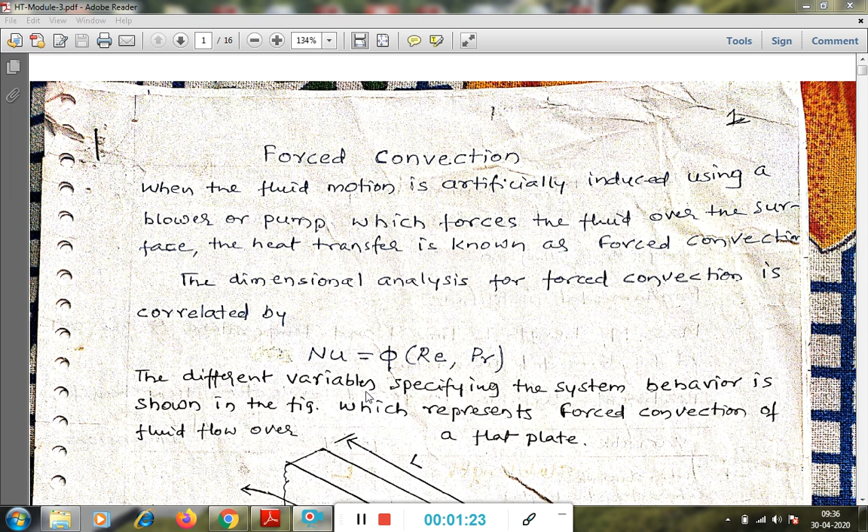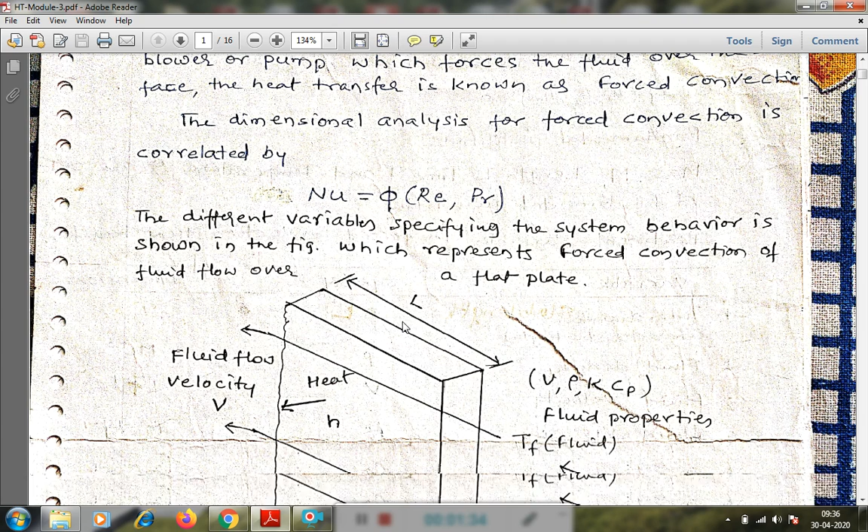For this, the dimensional analysis for forced convection is correlated by Nusselt number equals a function of Reynolds number and Prandtl number. Here the different variables specifying the system behavior are shown in the figure, which represents forced convection of fluid flow over a flat plate.

The different variables to be considered for forced convection are represented in this figure: surface temperature, heat transfer coefficient, velocity of the fluid, the dimension which is the length of the flat plate, the fluid temperature, as well as its viscosity and density, specific heat - all these are shown here.

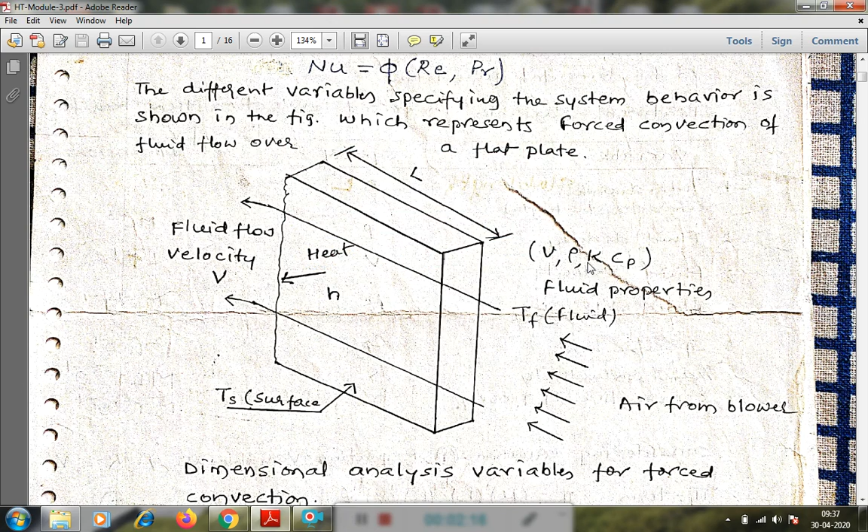The variables rho, k, Cp, thermal conductivity of the fluid - all these variables we have to consider for the dimensional analysis. This dimensional analysis uses Buckingham's pi theorem.

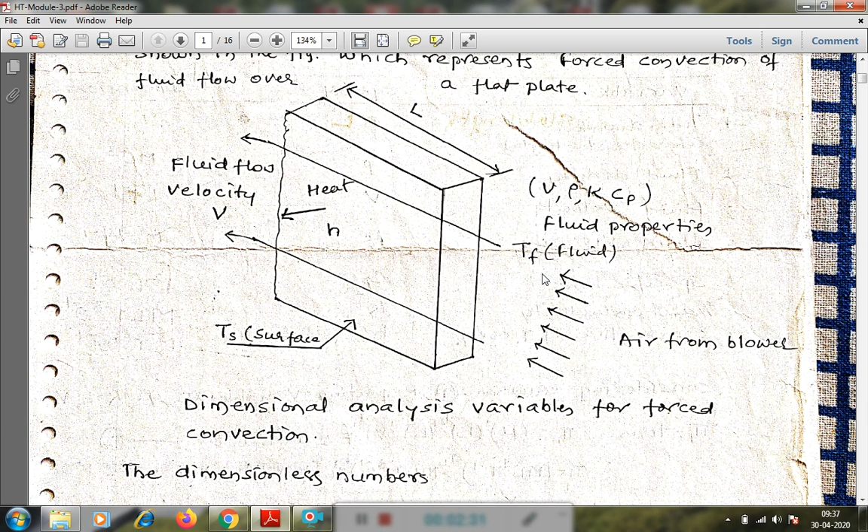From Buckingham's pi theorem, we find the different pi terms, and later we correlate these to find our desired equation.

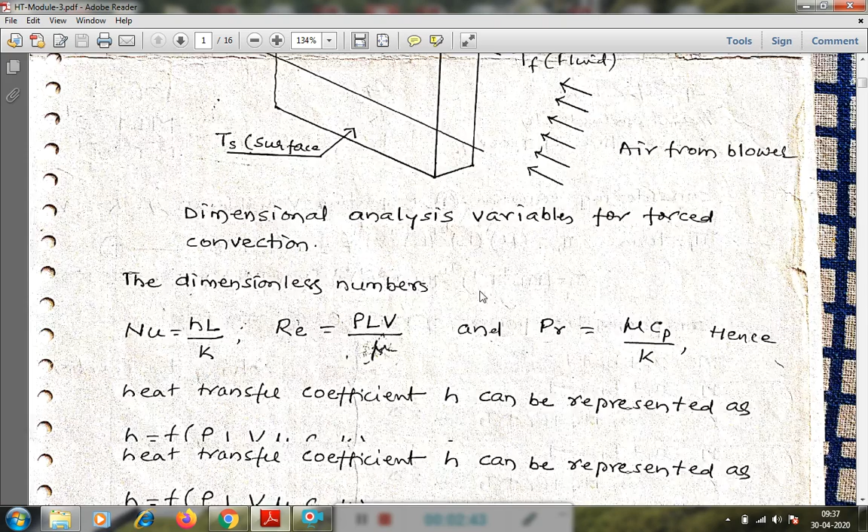As dimensional analysis variables for forced convection, these are the dimensionless numbers we have considered: Nusselt number is H L by K, Reynolds number is rho L V by mu, and Prandtl number is mu Cp by K.

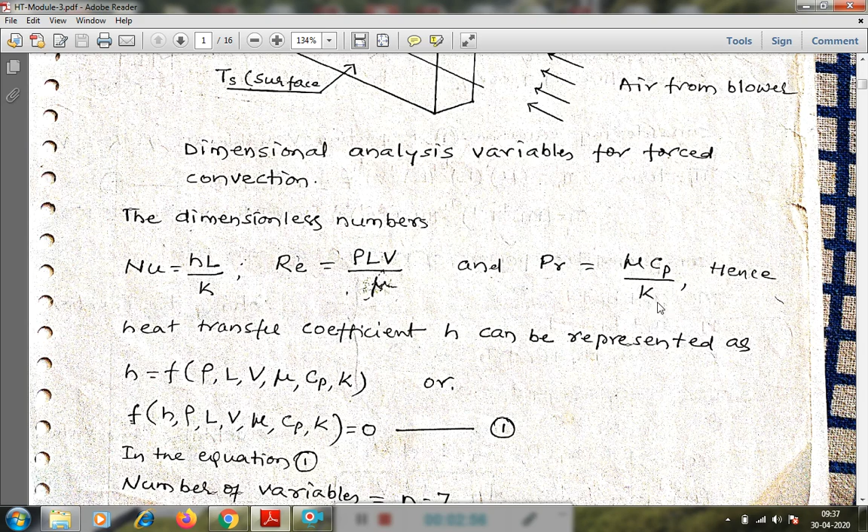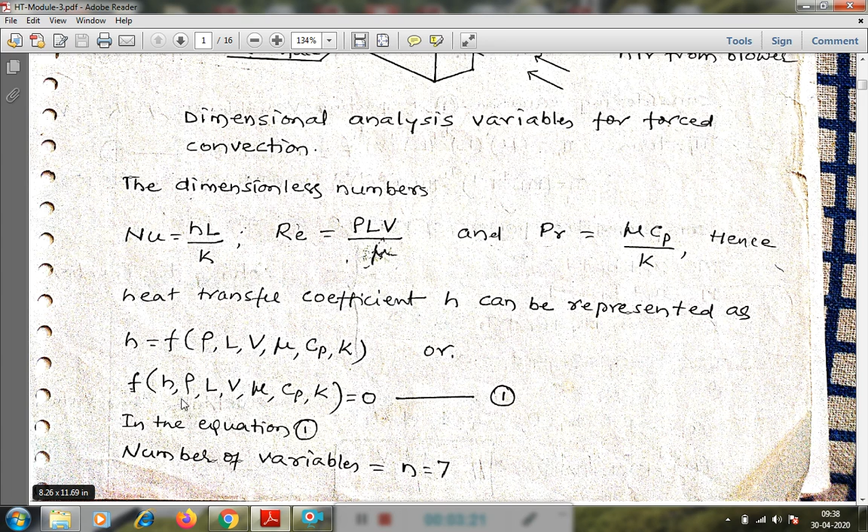Hence the heat transfer coefficient is represented as a function of the different variables - density, length, velocity, viscosity, specific heat, and thermal conductivity. This equation can be written as a function: f(H, rho, L, V, mu, Cp, K) equals 0.

This equation we will take as equation 1. In equation 1 there are a number of variables considered for forced convection - these are 7 number of variables. Then, what are the fundamental dimensions?

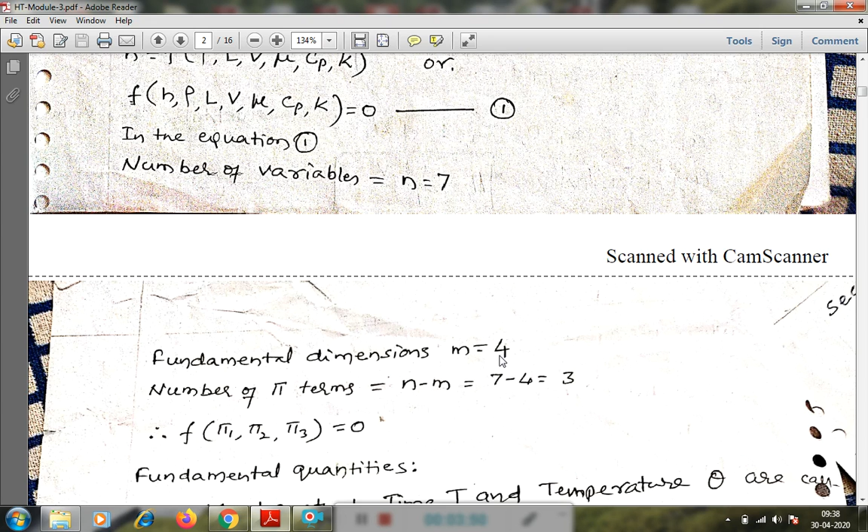Already we know there are 4 fundamental dimensions. The 4 fundamental quantities we consider as fundamental dimensions are mass M, length L, time T, and temperature theta. Then the number of variables minus the number of fundamental dimensions gives the number of pi variables.

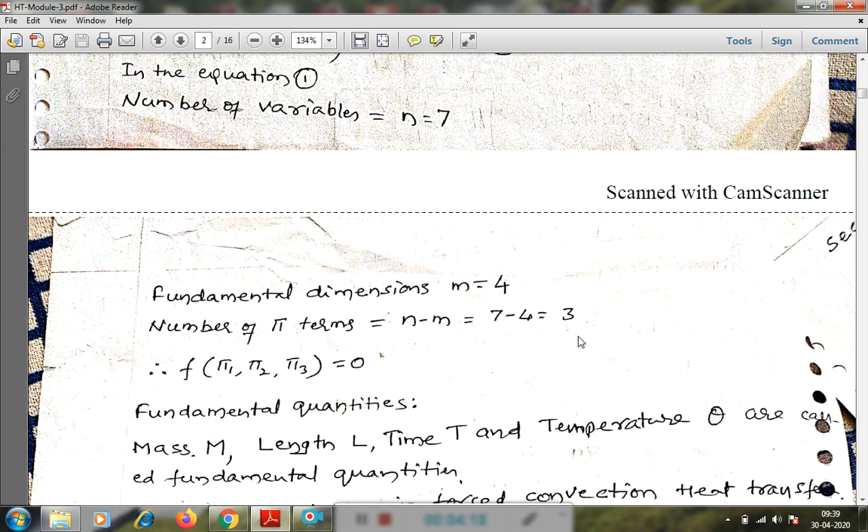This gives us 3 pi terms - pi 1, pi 2, pi 3 - as a function equal to 0. Here the pertinent variables in forced convection heat transfer, and their dimensions, we have to consider.

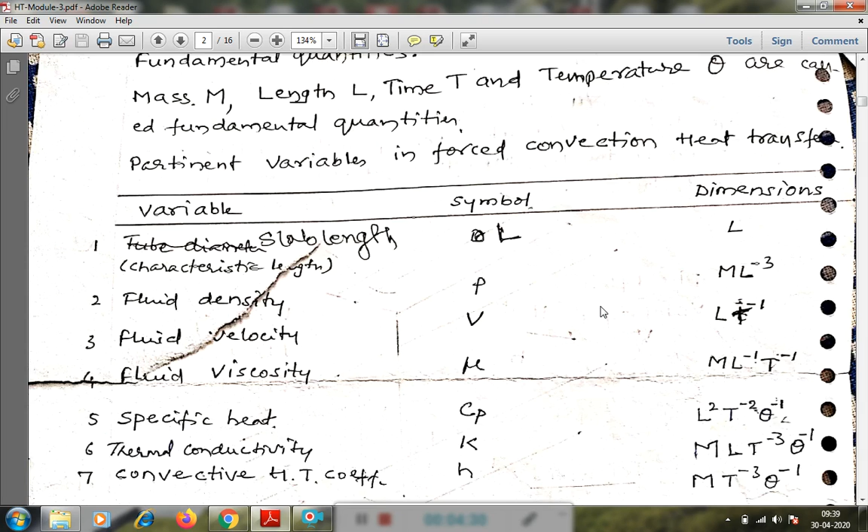First we take the slab length, that is the tube or slab dimension, the characteristic length L, with dimension of length. Then fluid density rho, that is kg per meter cube - kg is mass, and meter cube is length cubed, so M L raised to minus 3.

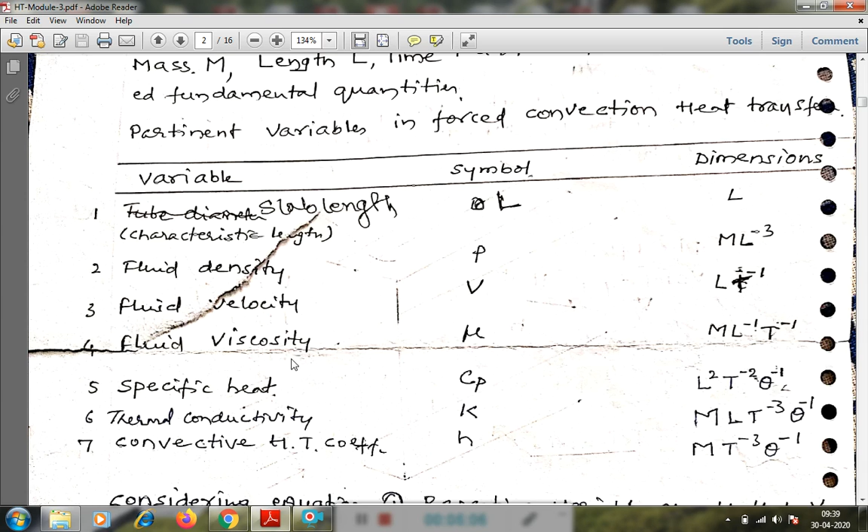Fluid velocity in meter per second is length per time, L T raised to minus 1. Similarly for fluid viscosity, substituting all the viscosity dimensions and simplifying, we get M L raised to minus 1 T raised to minus 1. For specific heat Cp, we get the dimension as L square T raised to minus 2 theta raised to minus 1.

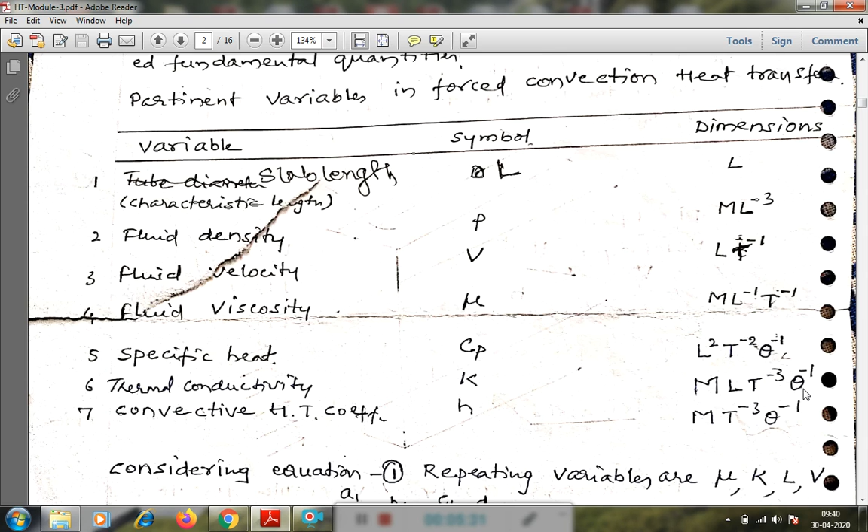For thermal conductivity, the dimension is M L T raised to minus 3, theta raised to minus 1. And coefficient of heat transfer, convective heat transfer coefficient H can be written as M T raised to minus 3, theta raised to minus 1.

Then from equation 1 we have to take the number of repeating variables. There are 4 repeating variables we have to consider, by considering the different properties: one is a chemical property, one is thermal property, one is physical, and another one is a flow property.

Here for the chemical property we have taken viscosity mu, for the thermal property we have taken thermal conductivity K, for the dimension or physical property we have taken length L, and for the flow property we have taken V. By considering here 4 we have to take that one. All the 4 properties we have to consider: chemical, thermal, dimensional or physical, and the flow property.

All these 4 we have to consider here, and these are the 4 repeating variables: mu, K, L, V. By taking all these repeating variables, the pi term can be written as pi 1, the first pi term, which is pi 1 equals mu raised to a1, K raised to b1, L raised to c1, V raised to d1, into rho.

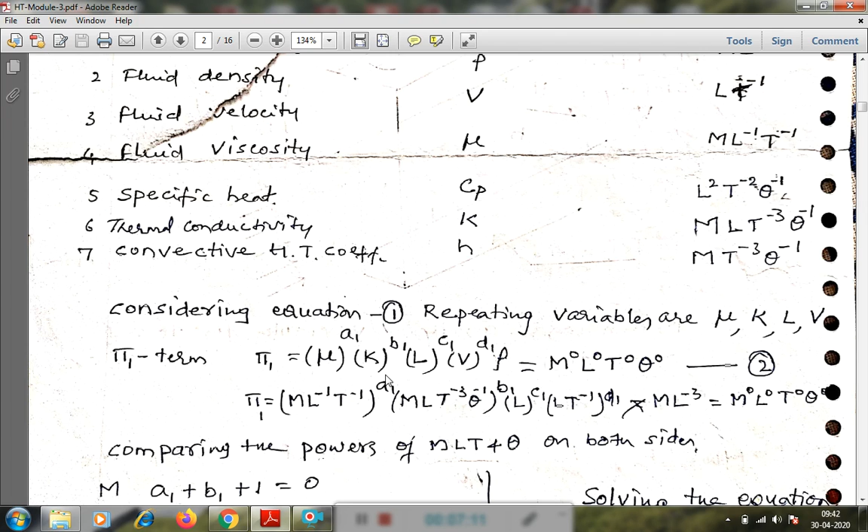After taking mu, K, L, V as repeating variables, 3 variables are remaining: rho, cp, h. One by one we have to take those variables along with this. That is, pi 1 equals M raised to 0, L raised to 0, T raised to 0, theta raised to 0. That is equation 2.

Now we have to substitute the dimensions of mu, K, L, V, rho and equate to the right hand side. The mu dimensions are M, L raised to minus 1, T raised to minus 1, raised to a1, then K is M, L, T raised to minus 3, theta raised to minus 1, raised to b1, and L raised to c1 for this L only, V is L, T raised to minus 1 raised to d1, and rho is M, L raised to minus 3, that is equal to M raised to 0, L raised to 0, T raised to 0, theta raised to 0.

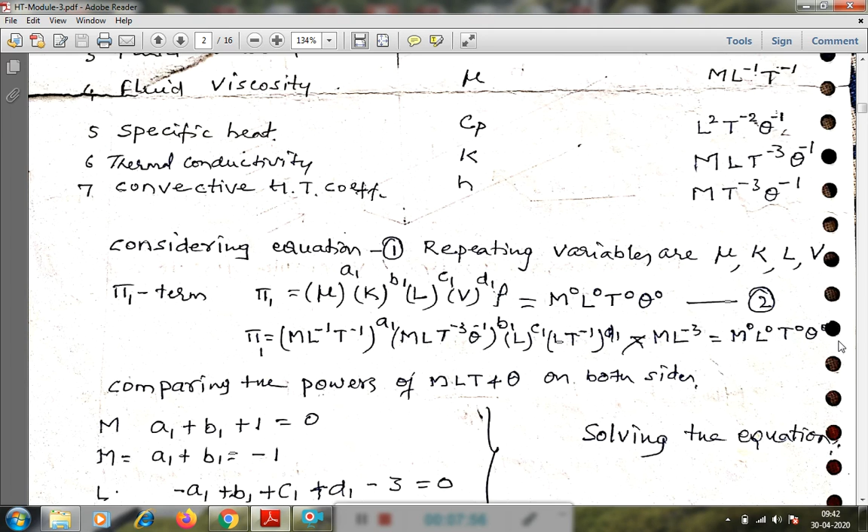Now comparing the powers of M, L, T and theta, or the indices of M, L, T and theta on both sides, left hand side and right hand side, we have to compare to find all these powers.

For the M comparison of power: here M raised to 1 is there, then a1 we have to take. M raised to 1 is there, then b1, so plus b1. Here M term is not there, here also M term is not there, here 1 is there, M raised to 1, so plus 1. On this side M raised to 0 is there, then we equate this one. So for M, a1 plus b1 is equal to minus 1.

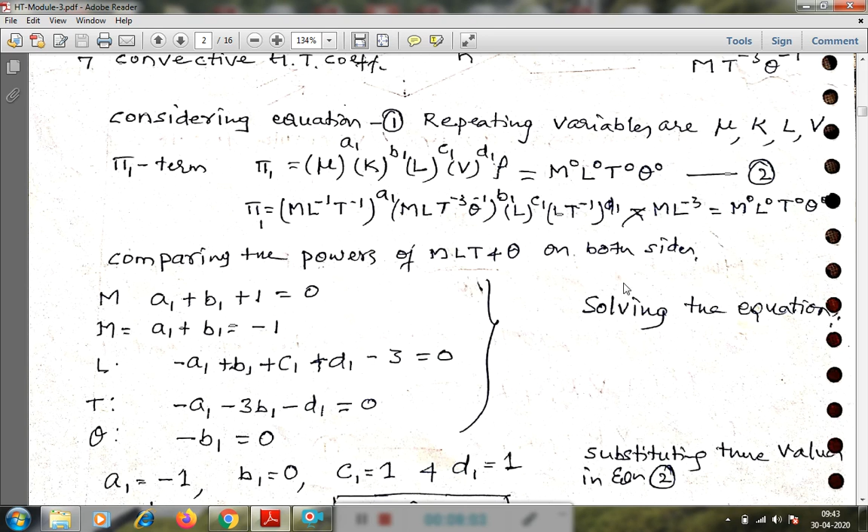Then comparing the powers of L: L raised to minus 1 is there, so minus a1. L raised to plus 1 is there, so plus b1. L raised to 1 is there, plus c1. L raised to 1 is there, plus d1. Here L raised to minus 3 is there, minus 3, that is equal to L raised to 0.

Then comparing the powers of T: here T raised to minus 1 is there, minus a1. Here T raised to minus 3, so b1. Here T term is not there, here T term is there, minus d1. Here there is no T term, and here T raised to 0, that is equated to 0.

Comparing the powers of theta: here there is no theta, and here minus 1 is there, theta raised to minus b1, and there is no theta term here also, and there is no theta term, that is equated to 0 only. Then minus b1 is equal to 0.

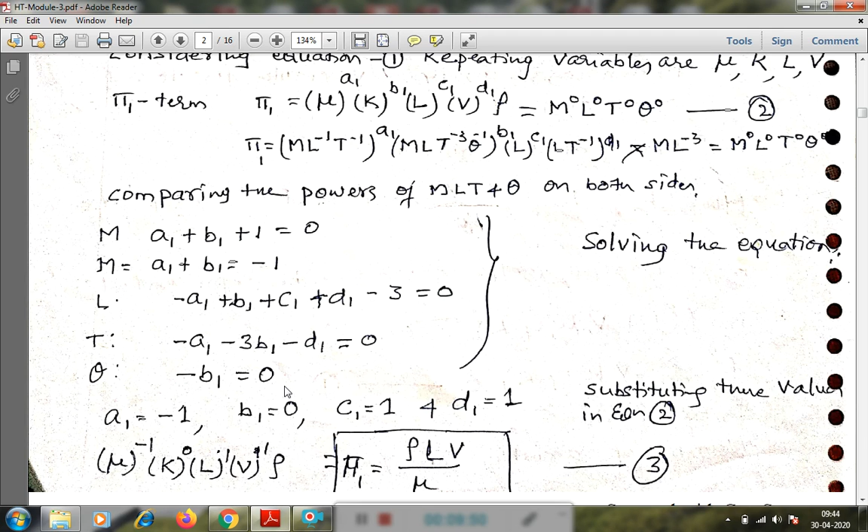Then solving these equations to find a1, b1, c1, d1: for this one, the first we will get is b1 is equal to 0.

This b1 is equal to 0 if you substitute in the first equation. Then a1 is equal to minus 1. Then a1 and b1 we know. For the third, these t powers, if you substitute a1 and b1, we get d1. This is minus of minus 1, that is plus 1. Plus this term will be 0, minus d1. Then this one minus d1, if you send to this side, this becomes a 1. Then d1 is equal to 1.

And all a, b, d, if you substitute in this equation, that is the L powers equation. This is minus of minus plus 1. This is 0 plus c1. This is d1 is 1 minus 3. Here 2 plus are there. Plus c1 minus 3 is there. Then this becomes a minus 1. d1 c1 minus 1, this becomes minus 1. If you send this side, that is also plus 1. Then c1 is equal to 1.

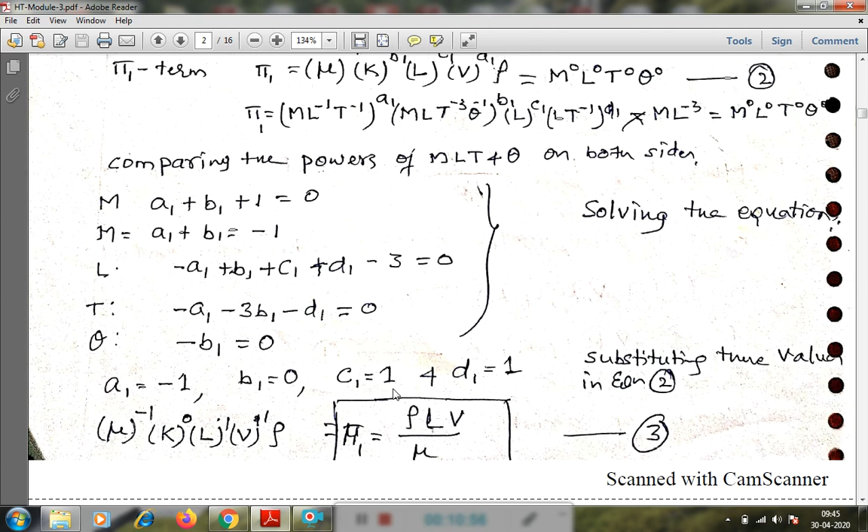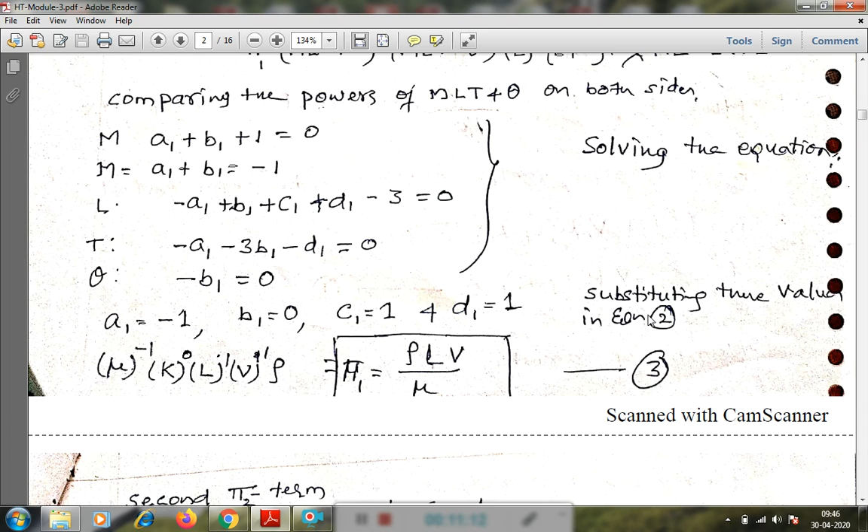Then here all the powers we got: a1 is equal to minus 1, b1 is equal to 0, c1 is equal to 1, d1 is equal to 1. Then substituting this in equation 2, we are going to get mu raised to minus 1, k raised to 0, l raised to 1, V raised to 1, rho. Okay, the rho we are getting.

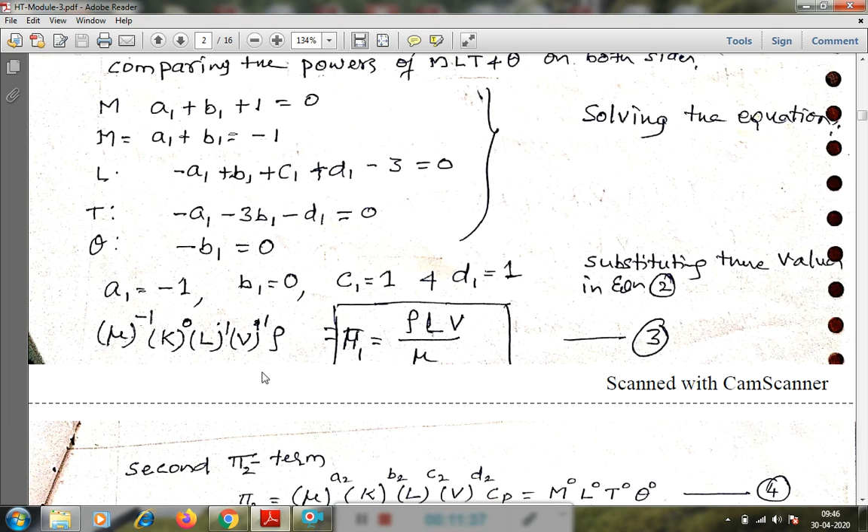Then here the first pi term, pi 1 is equal to: here that is rho L V, in the denominator k raised to 0 becomes 1. Then mu raised to 1 is there, taken into the denominator. Then we get rho LV by mu. This rho LV by mu is the Reynolds number.

This is equation 3. For the second pi term, pi 2 can be equated to mu raised to a2, k raised to b2, l raised to c2, V raised to d2, cp, that is equal to m raised to 0, l raised to 0, t raised to 0, theta raised to 0.

That is equation 4. Here substituting all the dimensions again in this one. Here the secondary variable cp is taken; in the remaining variables, the second one is cp. Then that is equated to 0, equated to the indices of all the variables being 0, the fundamental dimension 0, equated by powers.

Then comparing the powers of m, l, t, theta on both sides. For m: a2 plus b2, here there is no m term, that is equal to 0. Then for L: minus a2 plus b2 plus c2 plus d2 plus 2, that is equal to 0. Then for t: minus a2 minus 3b2 minus d2 minus 2, that is equal to 0. Then for theta: there is no theta term in the first, and in the second, minus b2 minus 1, that is equal to 0.

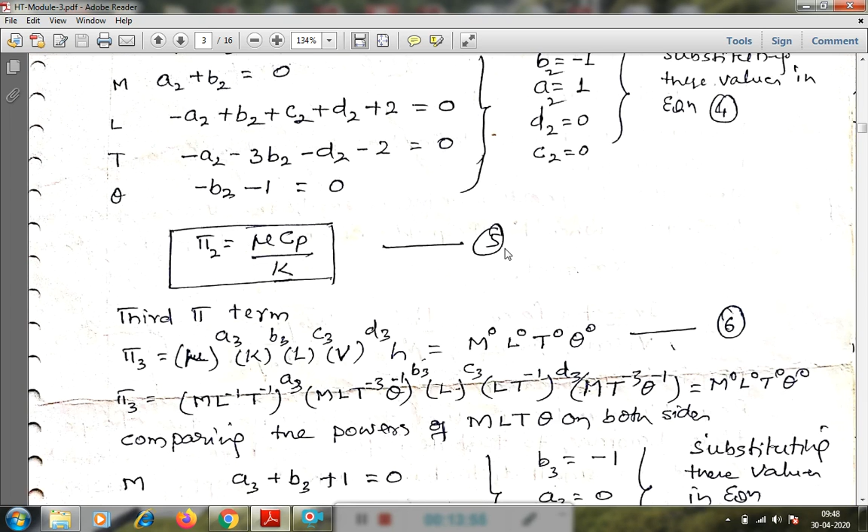Mu cp by k is the Prandtl number. Then for the third pi term, again we will substitute all the repeating variables with their indices, and h variable we have taken in the third pi term. Then that is equated to these dimensions raised to power 0.

This is equation 6. After substituting whatever dimensions of mu, k, l, h are there, then equated to 0. Then comparing the powers of m, l, t, theta on both sides. Similarly here for m: a3 plus b3 plus 1, that is equal to 0. Like this for L also we get: minus a3 plus b3 plus c3 plus d3, that is equal to 0.

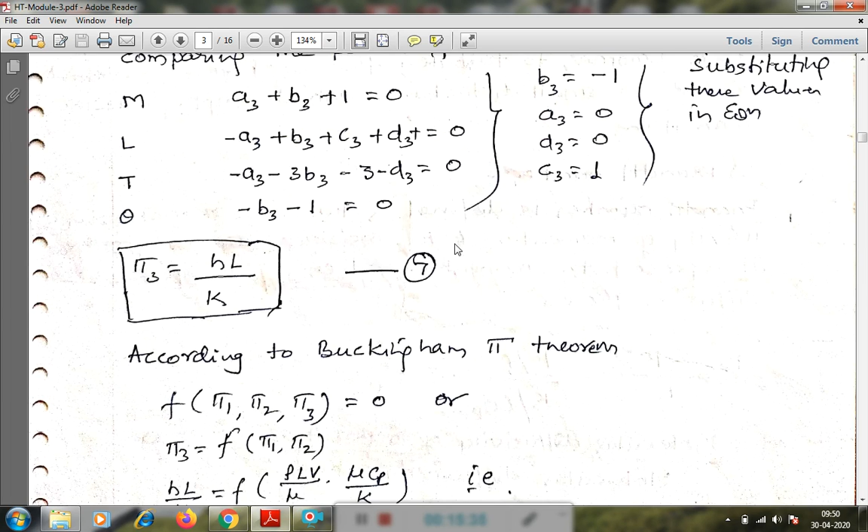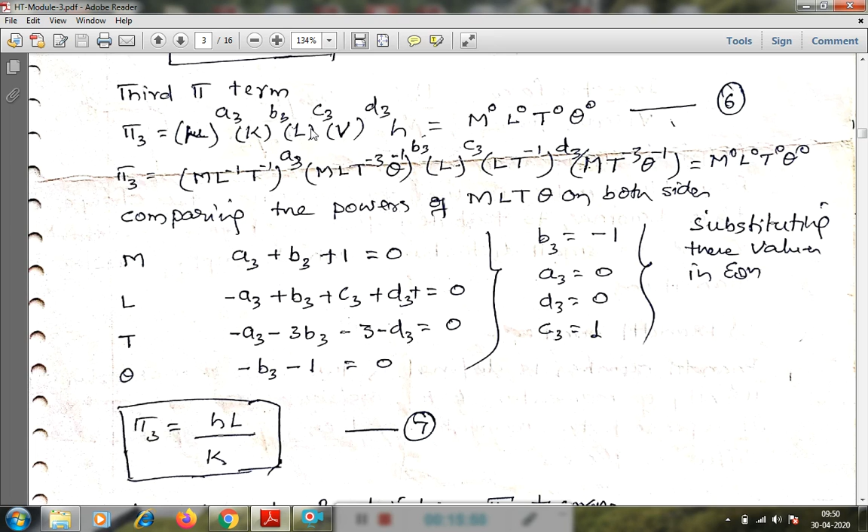After substituting B3 equal to minus 1, A3 equal to 0, we get A3 is 0 if substituted here with B3 equal to minus 1. Then for D3 we get 0, and substituting in the power indices, C3 is equal to 1. Substituting all these indices in equation 6, we get B minus 1, K in the denominator, C3 that is 1, so HL by K, which is the Nusselt number. This is the equation.

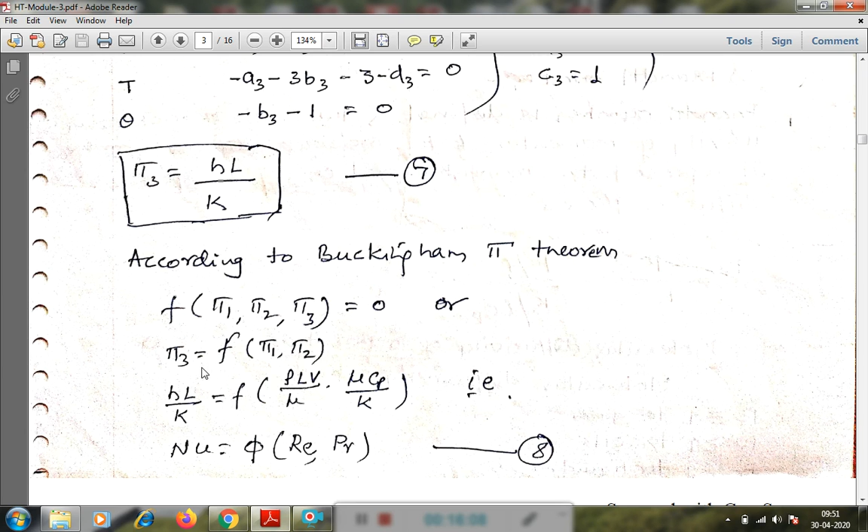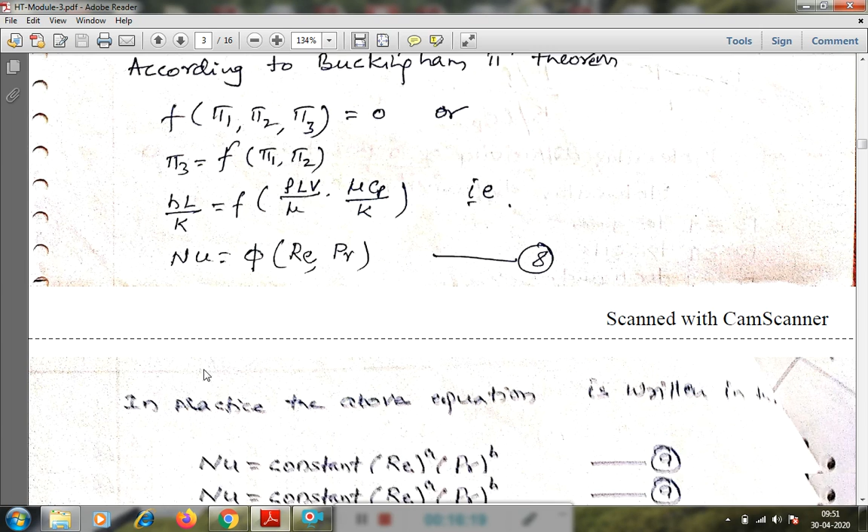According to Buckingham's pi theorem, the function of all 3 pi terms is equal to 0, or we can write pi 3 is equal to a function of pi 1 and pi 2. So pi 3, which is HL by K, is a function of rho LV by mu, and Cp mu by K. This can be written as Nusselt number is equal to a function of Reynolds number and Prandtl number.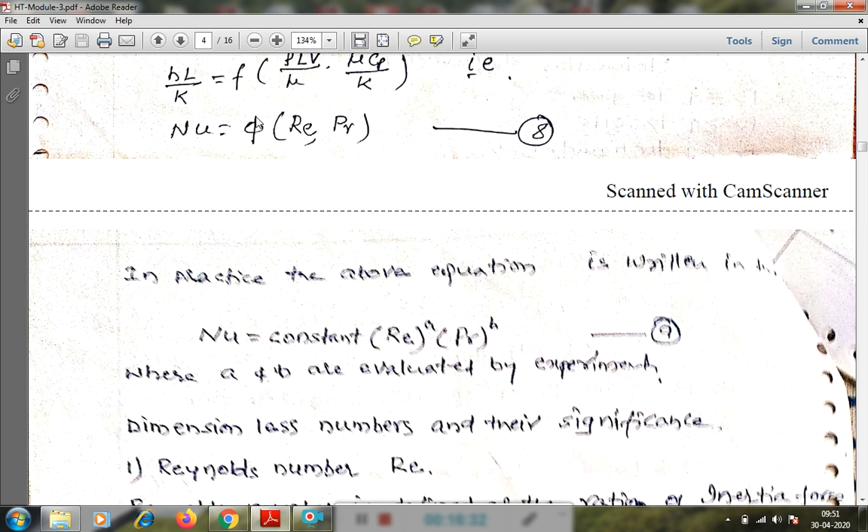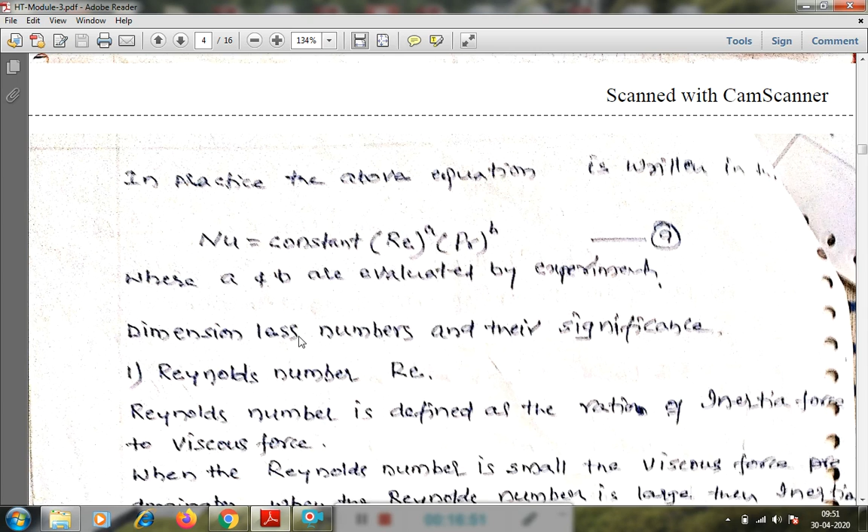This is the dimensional analysis of forced convection using Buckingham's pi theorem. In practice, this equation can be written as Nusselt number equals a constant times Reynolds number raised to some constant, times Prandtl number raised to some constant, where the constants A and B are evaluated experimentally for particular cases. We will take this up later.

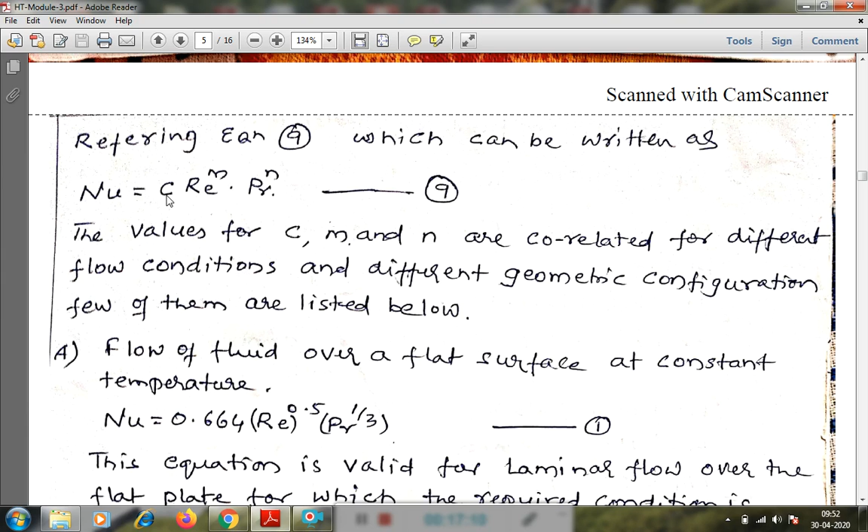Referring to equation 9, this can be written as Nusselt number equals C, a constant instead of a function, times Reynolds number raised to m, times Prandtl number raised to n. The values of C, m and n are correlated for different flow conditions and different geometric configurations, and a few of them are listed below. The first one is flow of fluid over a flat plate at constant temperature.

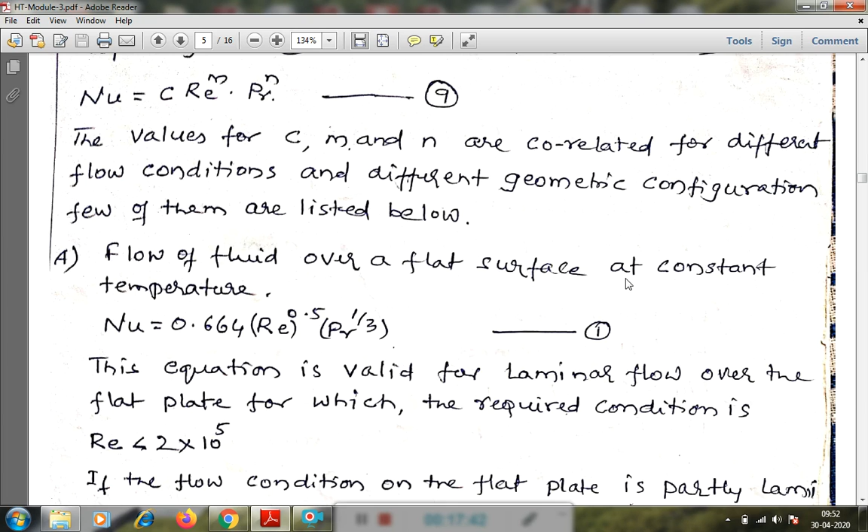At constant temperature, we get this equation: Nusselt number is equal to 0.664 times Re raised to 0.5, times Prandtl number raised to 1 by 3. This is the equation for this particular case. This equation is valid for laminar flow, that is, Reynolds number less than 2 into 10 raised to 5.

If it is more than 2 into 10 raised to 5, then it becomes transient or turbulent flow, and the equation is different for that case. For partly turbulent flow, that is, partly laminar and partly turbulent, there is a transition region.

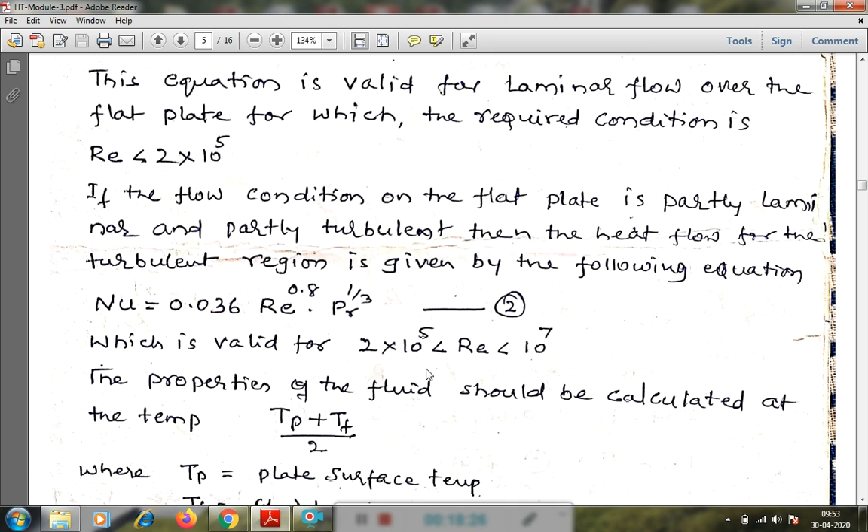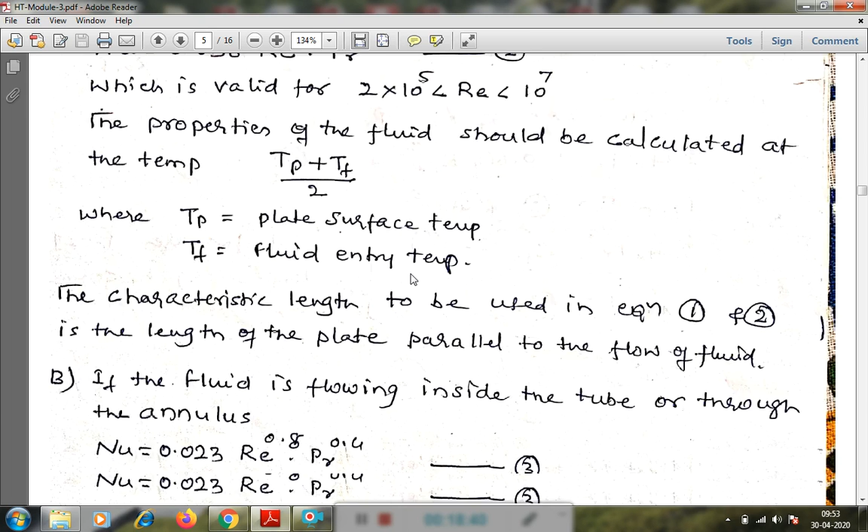For that transition region, laminar-turbulent region, the equation we get is Nusselt number equal to 0.036 Re raised to 0.8, Prandtl number raised to 1 by 3. This is valid where Re is greater than 2 into 10 raised to 5 and less than 10 raised to 7. All fluid properties are determined at the average temperature, that is, the fluid temperature and plate temperature divided by 2, the mean temperature, at which all properties are determined.

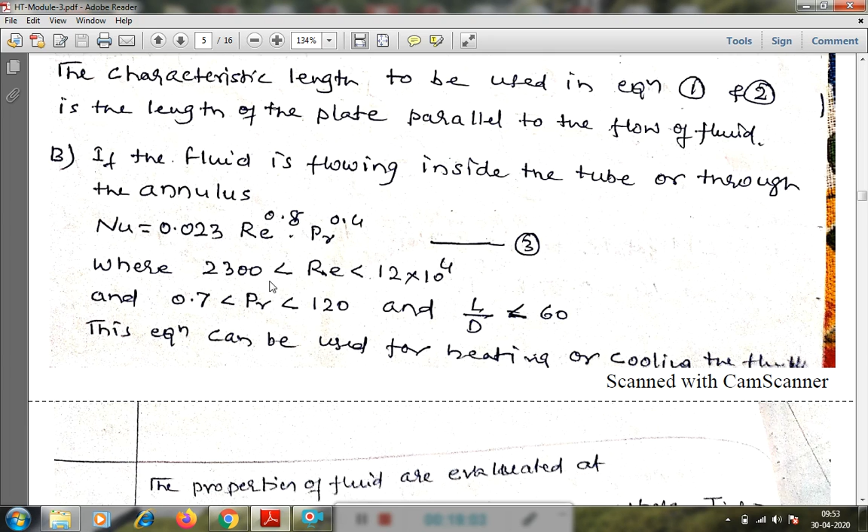If the fluid is flowing inside a tube or through an annulus, that is internal flow, we use the Nusselt number equation as 0.023 Re raised to 0.8, Prandtl number raised to 0.4, where Reynolds number is greater than 2300 and less than 12 into 10 raised to 4.

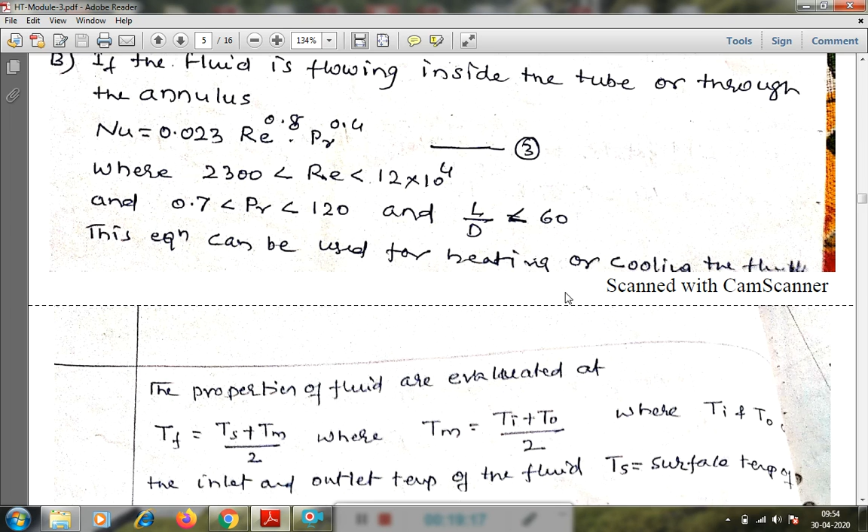Prandtl number is between 0.7 and 120, and L by D ratio is less than 60 for that particular pipe. Properties again are determined as the surface temperature and mean temperature of the fluid divided by 2.

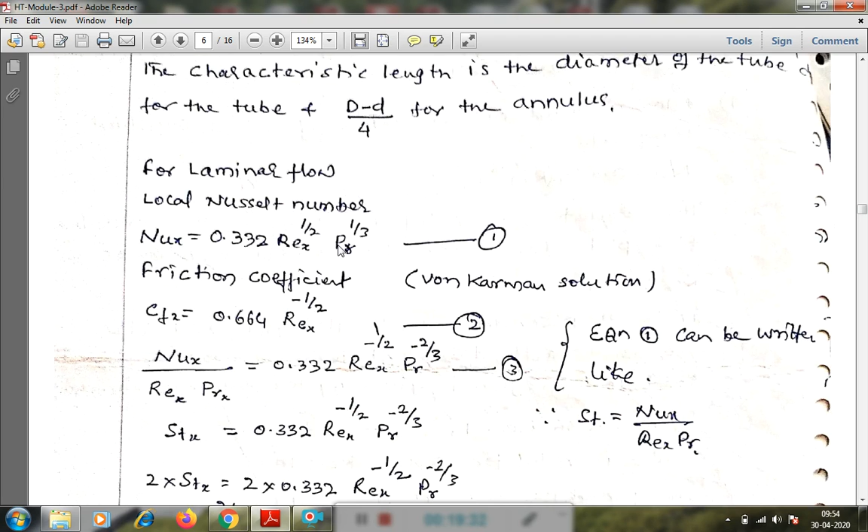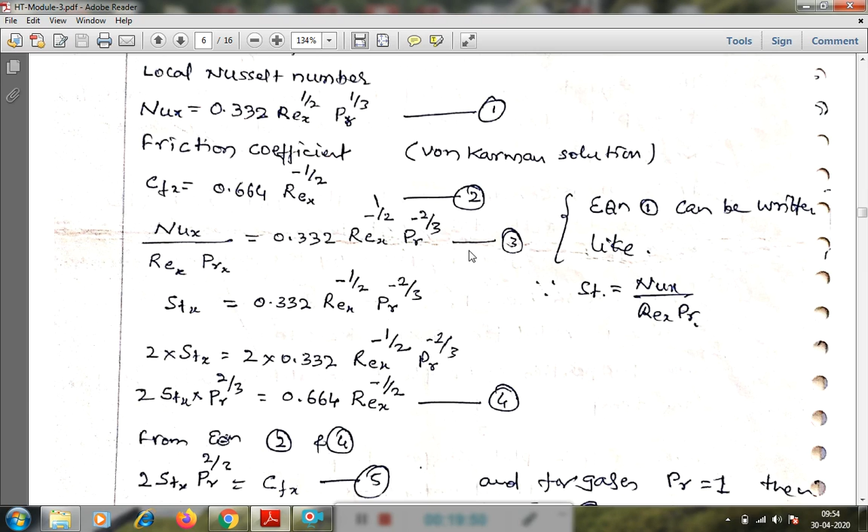Similarly, for laminar flow, the local Nusselt number is found using this relation. The average Nusselt number is given as 0.664, twice this value, using the average Reynolds number. The friction coefficient CFX can be obtained as 0.664 into Reynolds number raised to minus half. In terms of the Stanton number, we get 0.332 Re raised to minus half, Prandtl raised to minus 2 by 3.

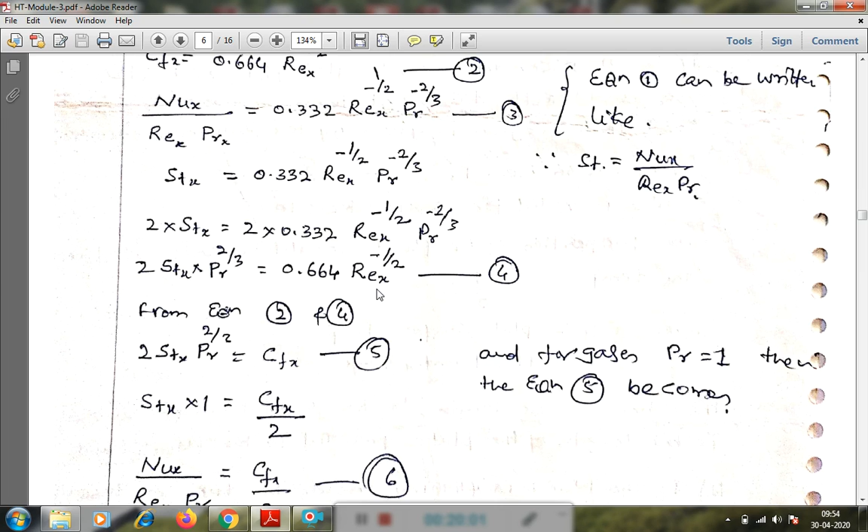In terms of the Nusselt number and Prandtl number, this coefficient of friction can also be obtained as related to the Nusselt number.

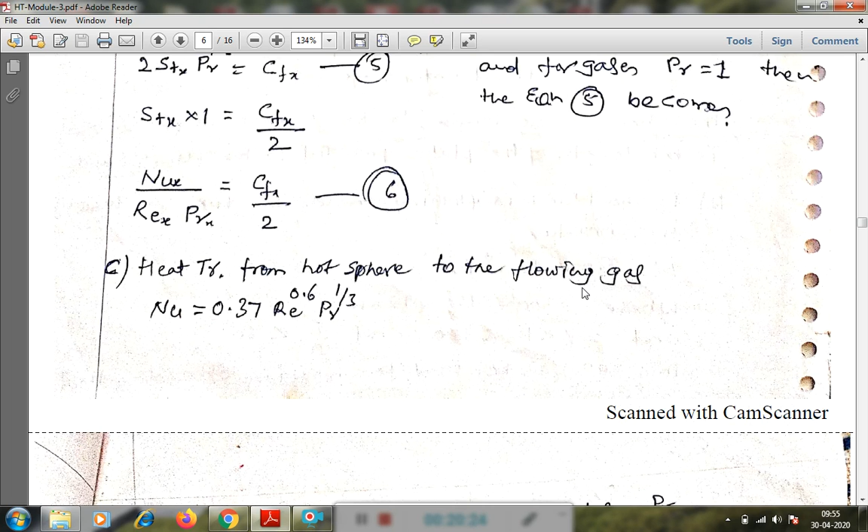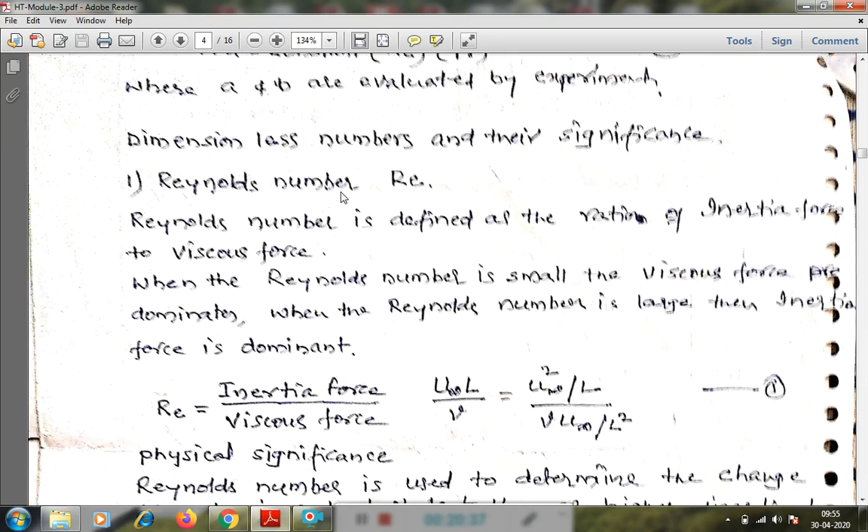These different dimensionless numbers we considered: Reynolds number, Prandtl number, Nusselt number, and Stanton number. These four numbers are dimensionless numbers, and we have to know their definitions as well as physical significance at this stage. Reynolds number's definition is the ratio of inertia force to viscous force. Already we know that one.

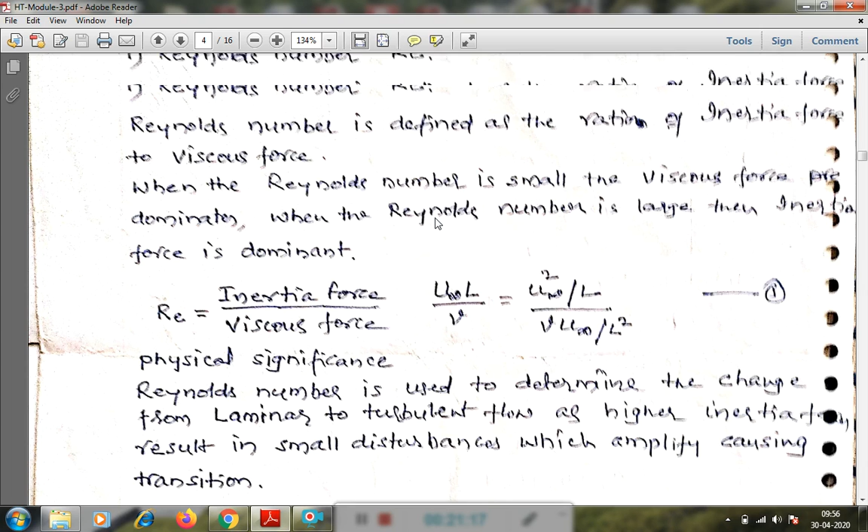That can be given as VL by nu, or rho VL by mu. Any of these we can find out from this. Reynolds number is available from the data handbook definition, but its physical significance we should know.

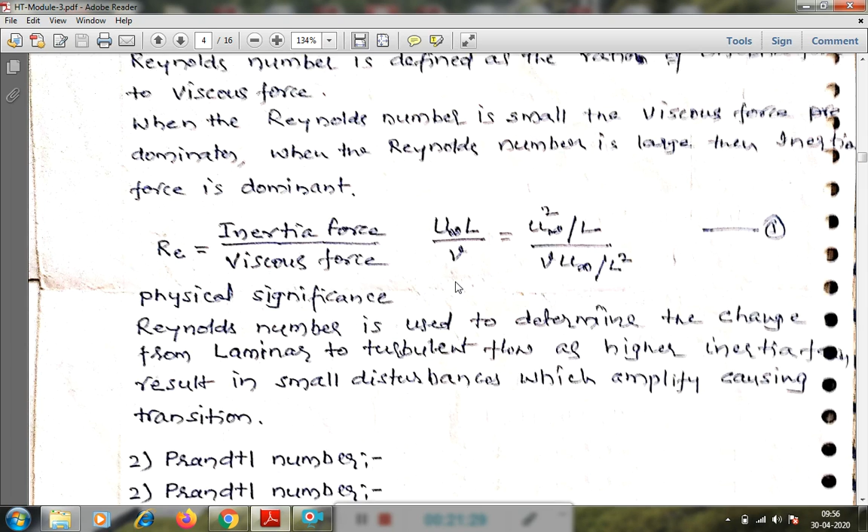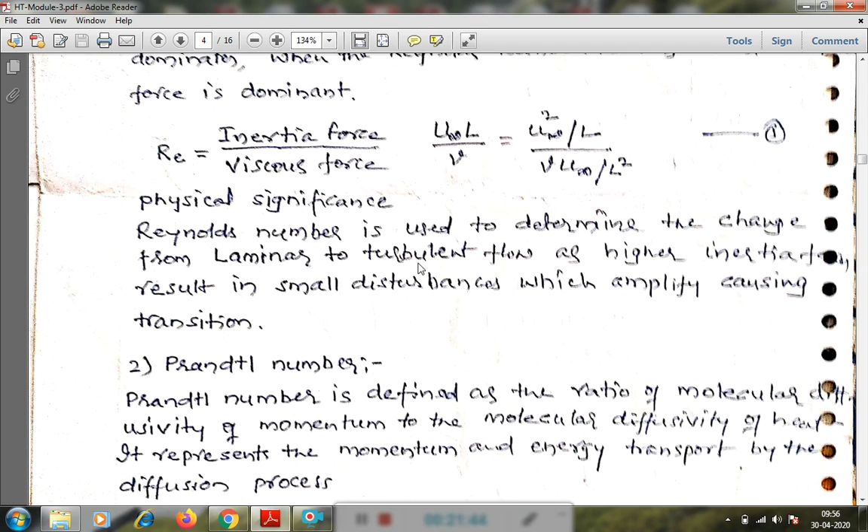Reynolds number is used to determine the change from laminar to turbulent flow. The Reynolds number is used for finding laminar and turbulent flows, and how the change between them occurs, which we can determine from this Reynolds number. If Reynolds number is less than 5 into 10 raised to 5, that is laminar flow. If Reynolds number is more than 5 into 10 raised to 5, that may be transition or turbulent flow.

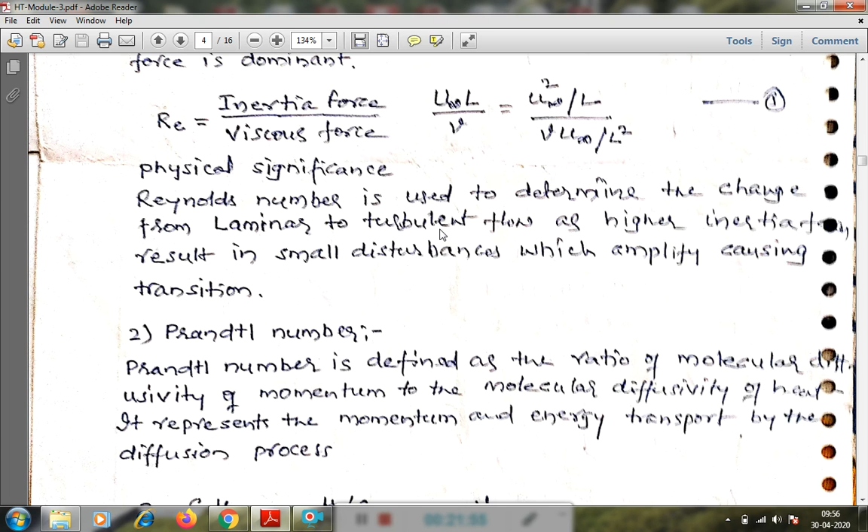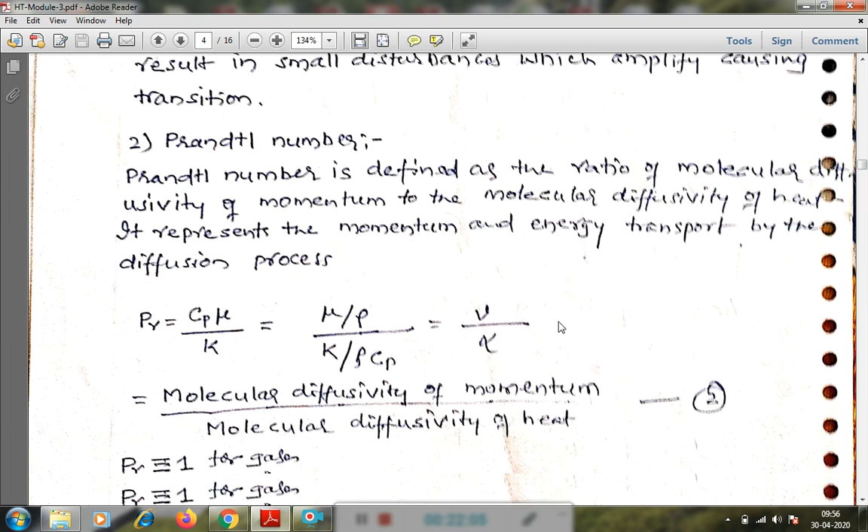Prandtl number is defined as the ratio of molecular diffusivity of momentum to the molecular diffusivity of heat. It represents energy transport by the diffusion process. It is the energy transport that it will determine. That is mu Cp by K, and it is also nu by alpha; in that way also we can determine it.

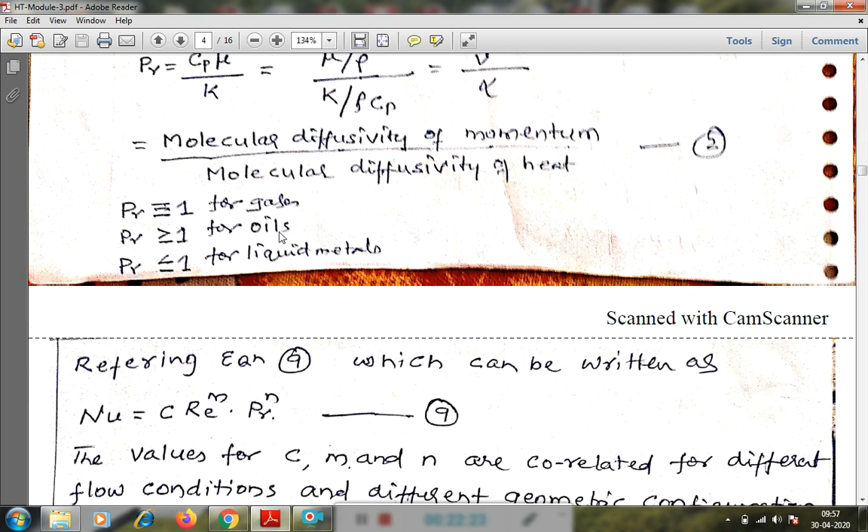Prandtl number is equal to 1 for gases, and it is greater than or equal to 1 for oils, and always less than 1 for liquid metals.

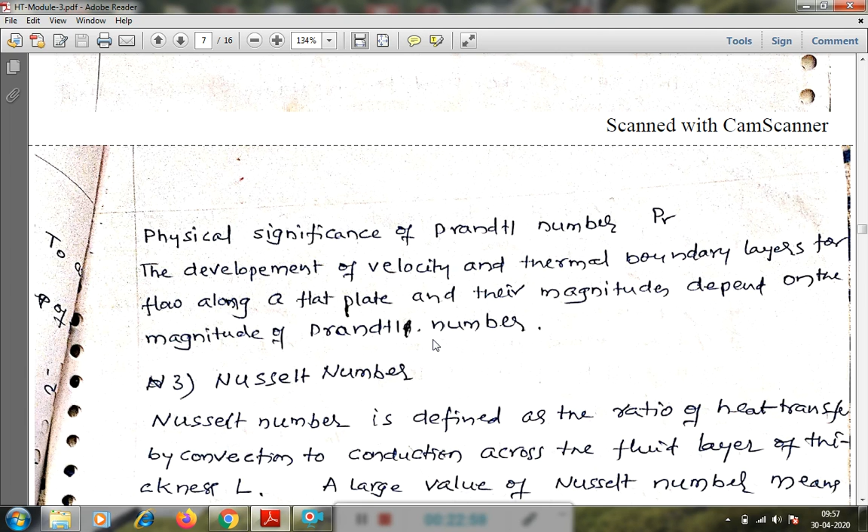Now the other physical significance of Prandtl number: the development of velocity and thermal boundary layers for flow along a flat plate, and their magnitudes, depend upon the magnitude of Prandtl number. So the velocity and boundary layer concept is what Prandtl number gives.

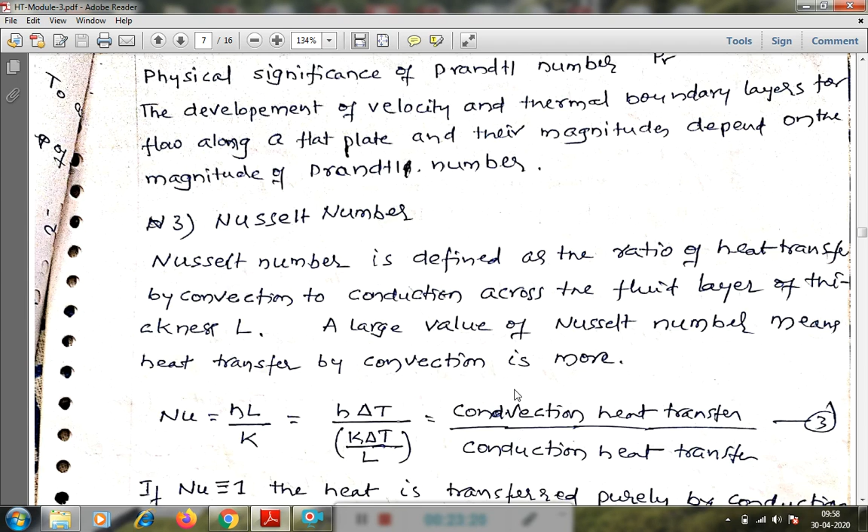Nusselt number is defined as the ratio of heat transfer by convection to conduction across the fluid layer of thickness L. A large value of Nusselt number means heat transfer by convection is more, that is, the numerator is more than the denominator, so convection heat transfer will be more than conductive heat transfer.

If Nusselt number is equal to 1, then heat is transferred purely by conduction. Nusselt number is a convenient measure of the heat transfer coefficient. This Nusselt number is always used for finding out the heat transfer coefficient.

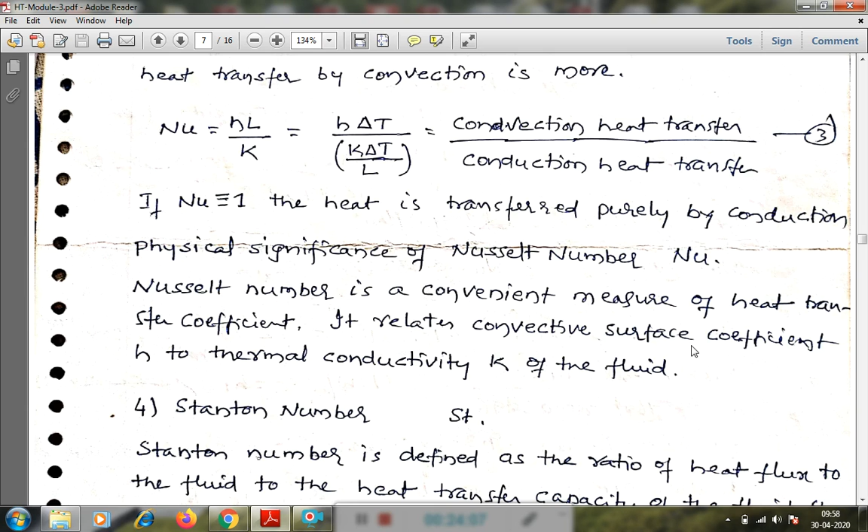As we know, in the boiling and condensation chapter we discussed, the heat transfer coefficient has to be determined using the Nusselt number correlation only. Here also it is a convenient measure of the heat transfer coefficient. It relates the convective surface coefficient to the thermal conductivity of the fluid.

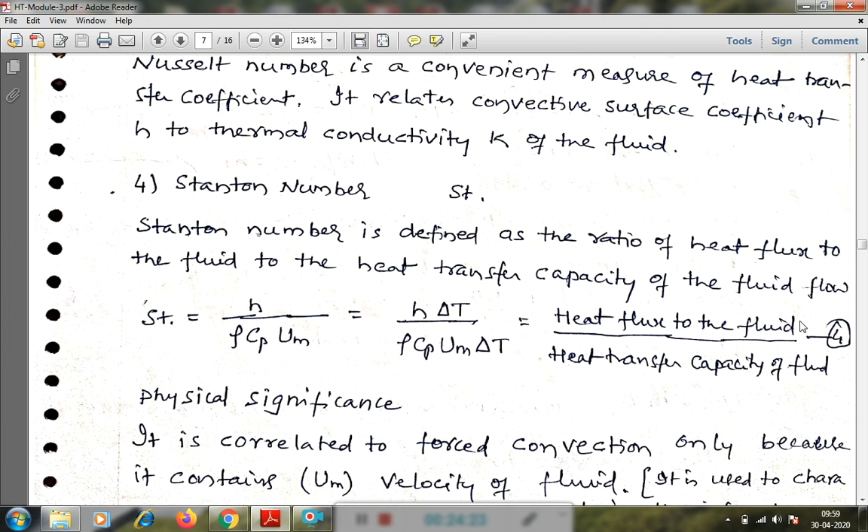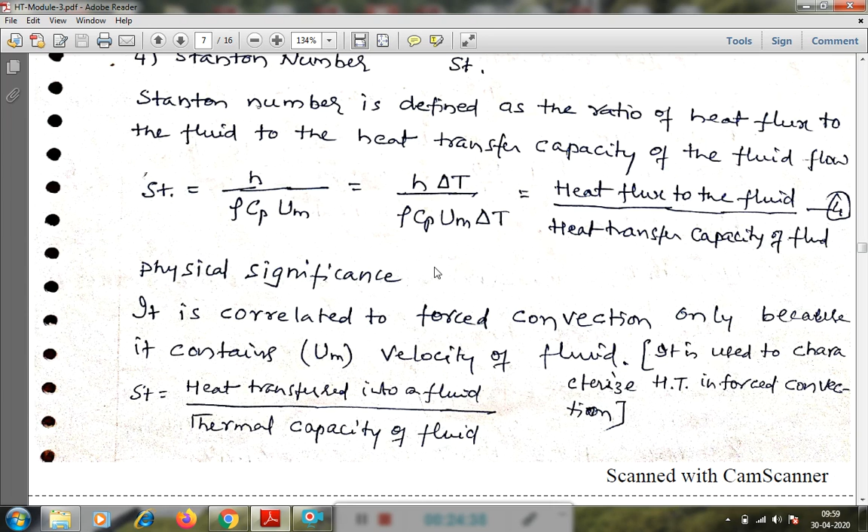The other number is Stanton number, defined as the ratio of heat flux of the fluid to the heat transfer capacity of the fluid. That is h by rho Cp Um, where um is the mean velocity; that is its physical significance.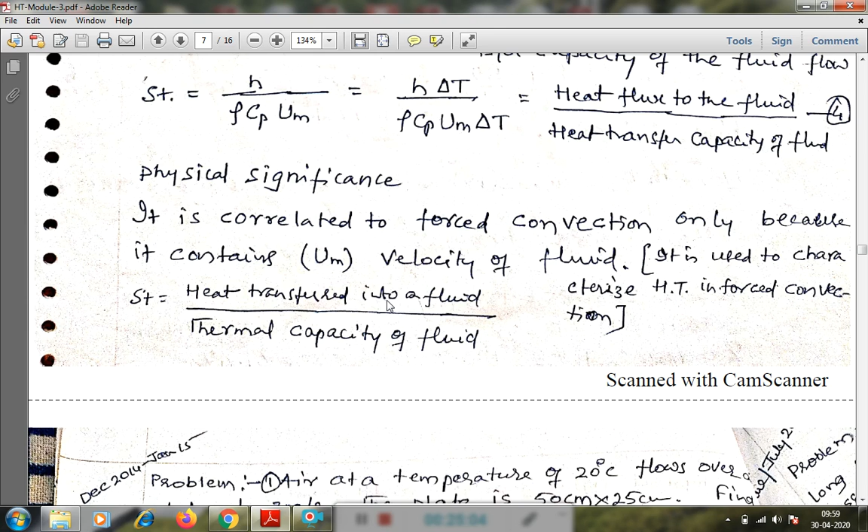It is correlated to forced convection only because it contains the velocity term. It is used to characterize the heat transfer in forced convection: heat transfer into the fluid to the thermal capacity of the fluid.

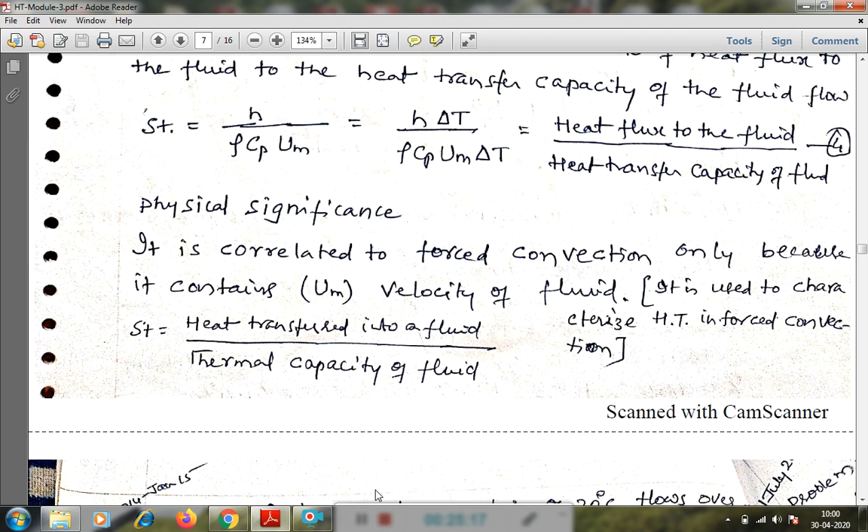These are the different non-dimensional numbers. All of these are available directly in the data handbook, but you should know their definitions, and later you have to define their physical significance. I will continue in the next class.